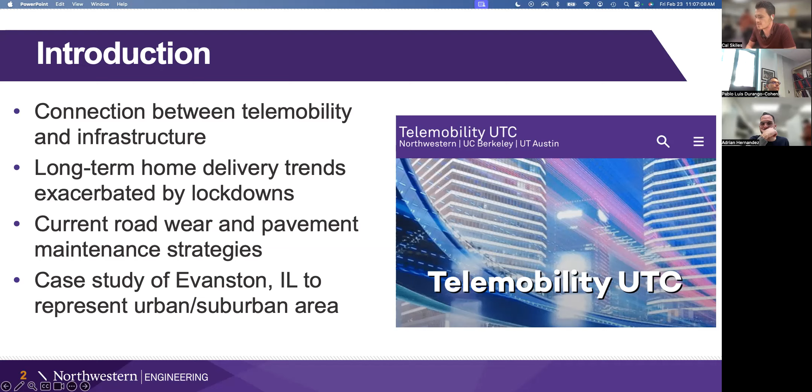And then we're also going to talk about the other side, which is what is going on with road wear and how it may also be happening more quickly and the condition of pavement is getting worse. And we'll talk about the maintenance strategies that are currently being implemented. The case study that will be presented is based on Evanston, since we are very familiar with it, and it is a representative sample of a suburban urban area with a lot of residential streets.

So it's just an interesting point to note that this growth in e-commerce may have been more dramatically impacted short term due to lockdowns, but this general trend was still being followed. And so this work still applies when you think about the general trend of e-commerce and the increase in home deliveries.

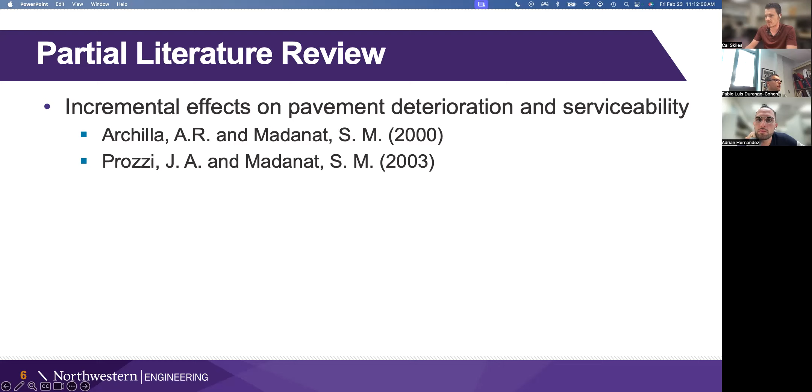Another one is this paper was on how to design asphalt pavement for heavy vehicle traffic. And so we're considering heavier vehicle traffic when considering delivery vehicles versus personal vehicles and changing the asphalt design based on them. And then in the end, what we're trying to do is increase flexibility in pavement maintenance strategies and not just sticking with what the status quo is in an attempt to maximize value.

And each of these papers presents similar ideas. And the hope is that by being somewhat flexible and slightly changing the pavement design, it allows for simpler maintenance by keeping schedules consistent.

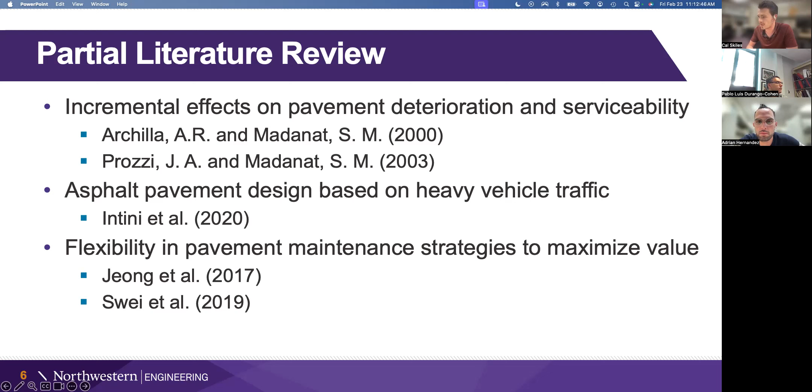All right, so we're going to go back to basics. The AASHO road test was a foundational study and is still used to this day in that it established relationships between pavement performance, pavement design, and traffic loading. And I'm going to go over the AASHO road wear equation thoroughly to show how it's set up, and how it's utilized in this analysis to account for these changes in pavement design and traffic loading, to give the pavement lifespan.

I included this map and this snip from Google Maps to show just how close we are to where this road test occurred, Evanston being up here. The road test occurred in Ottawa, where Interstate 80 now exists. And I learned very recently that one of the traffic loops still exists right next to the interstate, and you can see it from Google Maps. It's seen here.

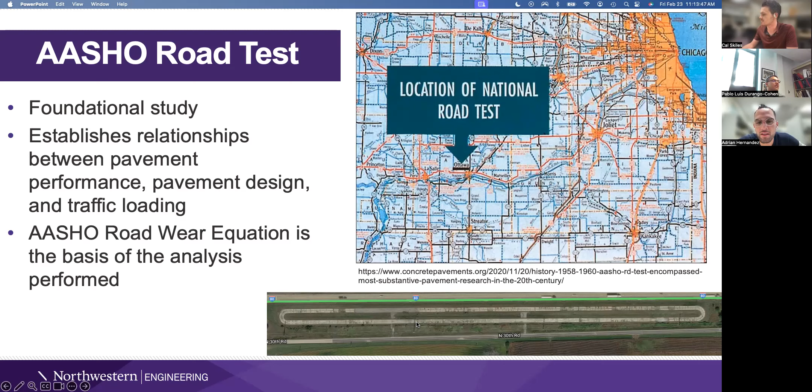So the equation itself, here, N is the number of equivalent single axle loads to failure. So the amount of traffic loading it requires for the pavement to reach a point where resurfacing is required. D is the pavement thickness. And when considering asphalt or flexible pavements, it's a linear combination of the surface, the subbase, and the base.

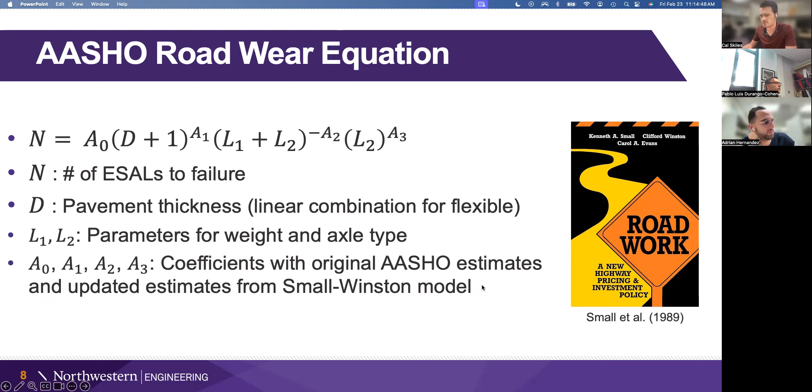And then the L1, L2 are parameters for weight and axle type that are fixed for this analysis, whereas the A coefficients, we are going to use two different model estimates, one from the original AASHO test and another set based on the Small-Winston model from this book. And I'll go into a little more detail on what the differences are between those two and why the update exists.

So these coefficient estimates were developed in the 60s for the AASHO road test, and they were built upon this very controlled environment test. And there was some skepticism around whether that really captured what real world results are or were. And so a number of other models were developed, and one of them was this Small-Winston model, which was built to better represent real world results. And as you'll see later, it leads to shorter pavement lives in our scenarios.

And then another important point is that a model comparison was performed in 2008 by Professor Durango-Cohen that included both of these models, and it showed that they were sufficient, especially when considering pavement failure. So if you're trying to figure out when the pavement fails, not just the transition between different levels of condition, but actually when it needs to receive maintenance or be resurfaced, that's what they're best for, and that is what we are using both for.

So what's shown here is just the differentiation between the coefficients for the two different models. And you see just slight variation, and we'll go into how we use each of these models together and find slightly different results in pavement lifespans.

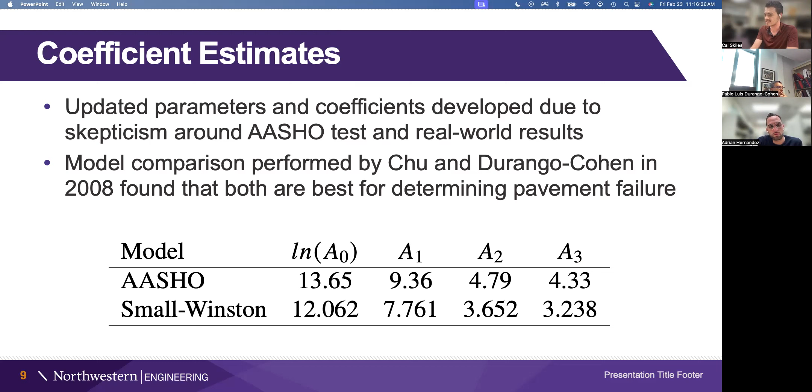All right, there are a number of assumptions made, and each of them has backing in either an existing project, a construction plan, or Department of Transportation statistics, and I'll just go over them really quickly. So the average annual daily traffic of the lowest volume residential street in Evanston is approximately 200 vehicles. This is from the Illinois Department of Transportation.

When looking at a map of streets in Evanston, it's the lowest volume shown on any street, and it represents an example of a basic local road. Pavement design: this is from a construction project at an intersection where a minor residential street intersects a major street, and it showed the pavement design as having an 8-inch subbase and 3-inch surface.

The average urban delivery vehicle weight was found as the medium duty delivery vehicle, which is the most common in urban areas, and that had an average weight of 14,000 pounds. The traffic mix is built off of a previous study that looked into road wear on residential streets. And so it's based on mostly personal vehicles, so cars and trucks, 5% delivery vehicles, and 5% heavy vehicles, which would be like garbage trucks or buses or things like that.

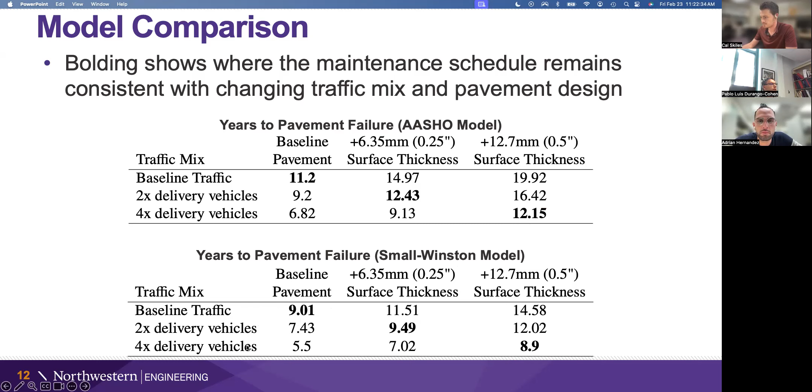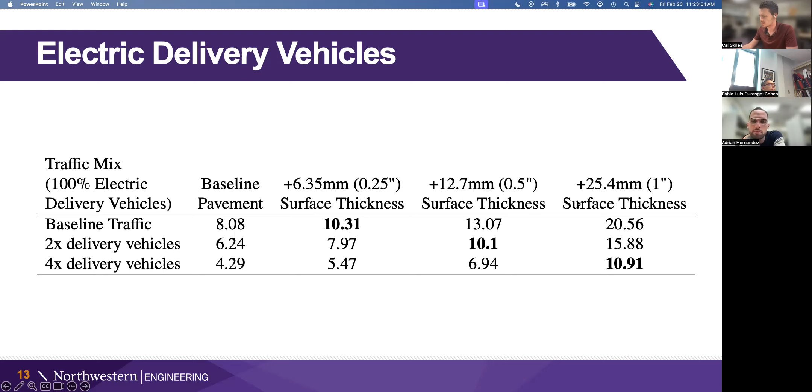And so you see right away that we now need to consider greater increases in pavement surface thickness to have a reasonable pavement lifespan. And the electric delivery vehicles' increased weight, while it could be seen as insignificant, 1,400 pounds out of 14,000, for a number of vehicles that is close to 10 per day, it still over time does build up and does have an impact on the pavement service life. And so we account for that by increasing the surface thickness by more.

All right, then we did some environmental analysis on top of just electric delivery vehicles and the idea of transitioning to them. And so the first key point was that the most important thing to keep emissions down is to keep pavement properly maintained. And so this is the idea of the whole analysis: we want to make sure the pavement is not failing more quickly. We want to make sure it lasts the proper amount of time and we're resurfacing consistently as we have been.

And then the other point that was a little surprising, but a good point to note, is that modern diesel-powered delivery vehicles do not significantly increase emissions compared to gas-powered cars. So this increase in delivery vehicles would be similar to an increase in cars that is also plausible.

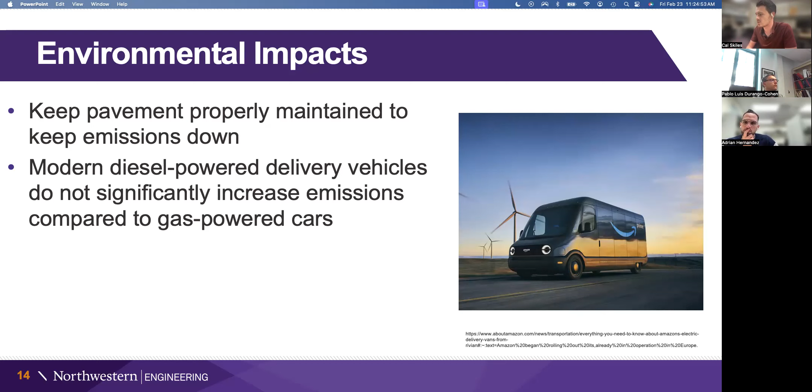And then the point of shifting to electric delivery vehicles is important environmentally because you have a very strong likelihood that these companies see value in shifting to electric delivery vehicles. And it could be controlled from a regulation standpoint because it's all companies and there aren't that many of these companies that could be regulated. And as an example, Amazon currently has about 10,000 electric delivery vehicles as of a few months ago, and they've committed to having 100,000 by 2030. And most of them look like this Rivian van you see right here.

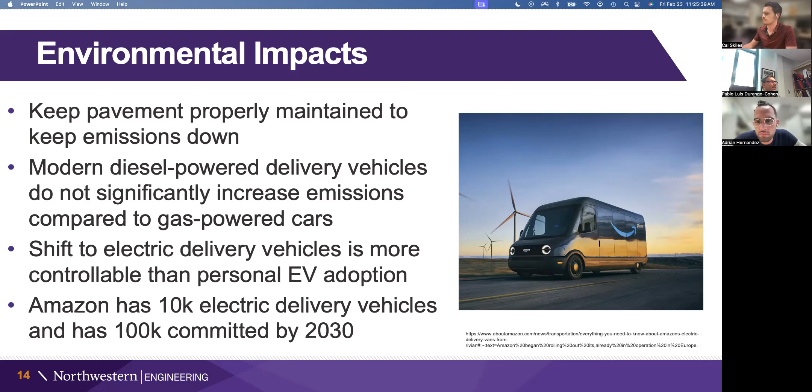All right, now we're going to go into a little bit of the costs involved and how we consider those and justify them. So the materials cost is the only change in direct costs from this pavement design change. The slight increase in surface thickness requires additional materials, and each quarter-inch increase costs an additional $17,500 per mile of roadway. And then the other costs, the fixed, the labor, the equipment, remain approximately the same, while the social costs like public disruption and environmental are reduced by keeping the pavement maintenance schedules the same and not needing to increase the frequency of maintenance.

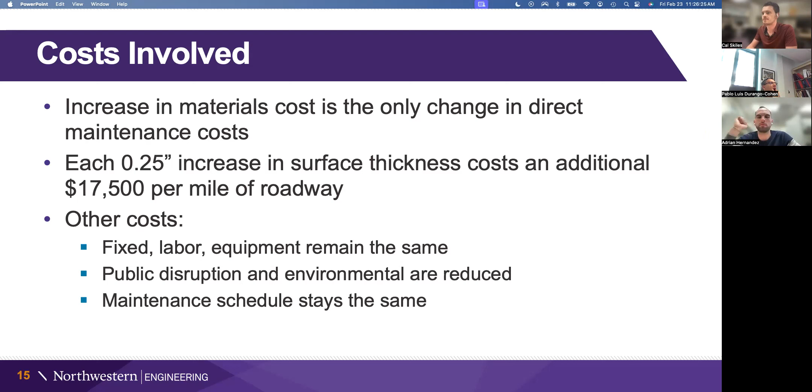And so in Evanston, there are approximately 100 miles of local roadways. And if one were to consider the half-inch increase of surface thickness, it would require an additional 50,000 tons of asphalt, which costs approximately $3.5 million. And the annualized equivalent value at a 5% discount rate is $175,000. And the way that we thought of to account for that is there would be a corresponding reduction in budget allocation to the pavement patching program that we went over earlier.

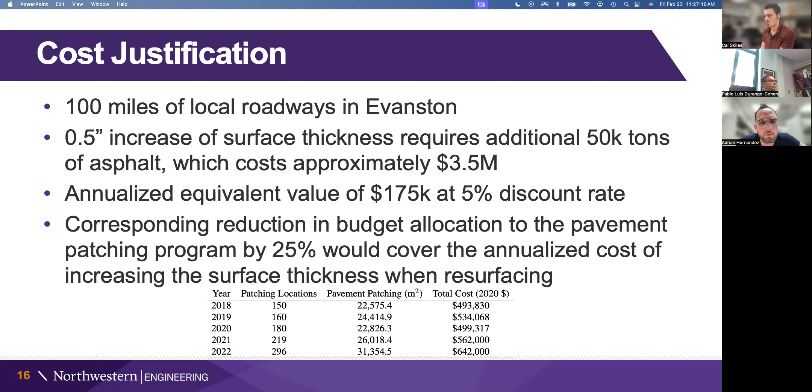And if you were able to reduce it by 25% back to approximately the value it had in 2018, it would cover this annualized cost of increasing the surface thickness when it is time to resurface each of these residential streets in Evanston. Right, because the difference here between 642 and 493 is approximately 150,000. And so we're getting in the ballpark of this value.

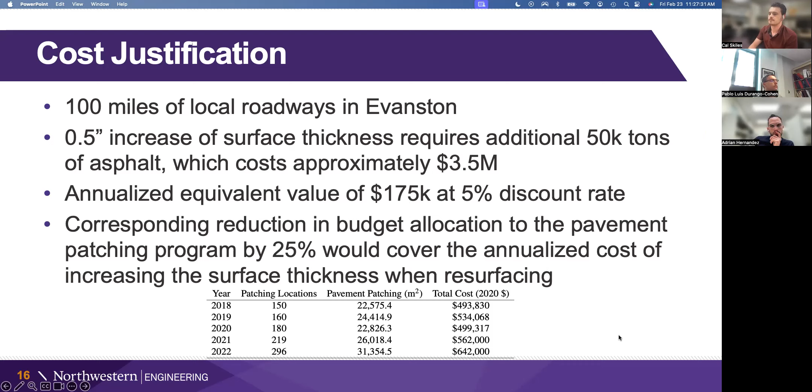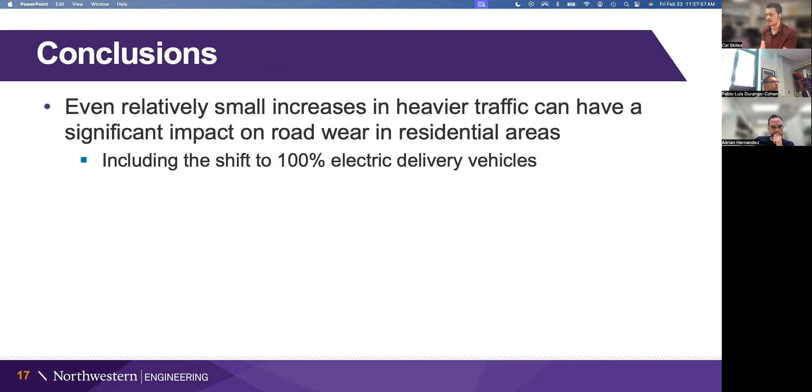So the conclusions, we've covered them in general, but the point is that even having relatively small increases in heavier traffic, this is like going from 5 to 10 or 10 to 20 electric delivery vehicles on these residential streets, or shifting to 100% electric delivery vehicles, has a noticeable impact on road wear in residential areas. And this single change of pavement design that we discussed was just increasing the surface thickness, and it can account for this change in traffic, even if it's very simple.

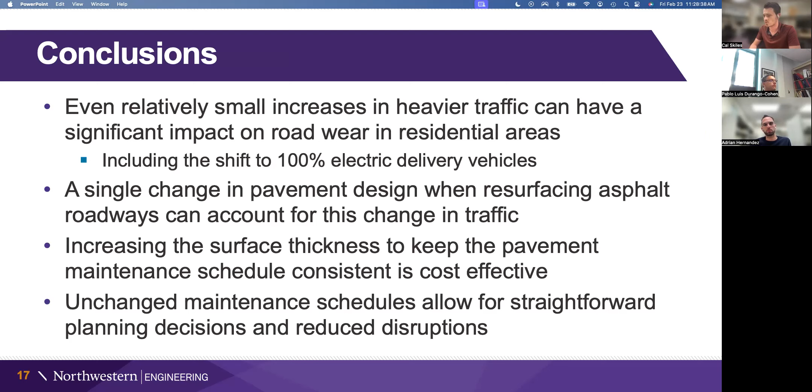We found that it is cost effective when you consider the idea of the pavement patching program being reduced in the scenario where the surface thickness is increased and the road does not fail as quickly. And the last point is that not changing the maintenance schedules, so keeping them consistent, allows for straightforward planning decisions and reduced disruptions, which is what the overall goal was of this analysis.

So thank you. I do have a couple potential extensions that came out of discussions with Professor Durango-Cohen and a few that came from presenting at TRB and people talking to me. So if you have any questions on these or anything at all, please feel free to ask. Thank you, everybody.

Very cool, Cal. I guess I have a question. Please. So I know that the focus and the scope was mainly delivery vehicles, and the question was, for delivery vehicles, that transition to electric vehicles.

But I guess as the penetration rate of passenger electric vehicles increases, this is only going to make this even more problematic. I wonder, do you know what the difference in weight of an average passenger gas versus electric vehicle is? And do you have a sense of what impact this might have, and if this could be applied to that question? Yes. So it's a similar percentage. It's like 10% of the weight.

And so it's in the range of the average passenger vehicle going, because I think what I ended up doing was taking an average between cars and trucks, and it was like 6,000 pounds that I used for personal vehicles. And so it'd be like adding approximately 600 pounds to that. And why it's not as significant is because of the exponential nature of the fourth power rule and this AASHO road wear equation: going from 6,000 to 6,600 pounds has a much smaller impact than going from 14,000 pounds to 15,000 pounds because it's not linear.

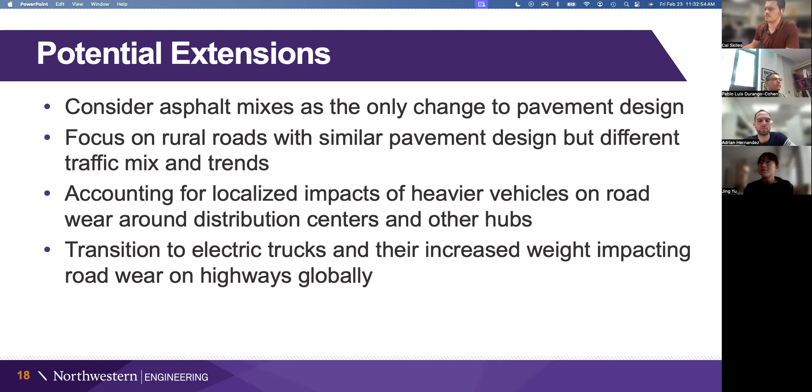Hi, Cal. Yeah. Nice presentation. I may have missed the part where you talked about the baseline. Would you mind going back and talking about which baseline you're using and how you found the baseline? Yes. So the baselines were built out of these assumptions. The baseline traffic is based on 200 vehicles per day, which is a number presented by the Illinois Department of Transportation for a representative street in Evanston.

And the mix is based on a study that was done for how to consider heavier vehicles in rural areas. And so we were looking at slight differentiation from the rural areas to the suburban areas. This is very similar to the rural with a slight change in decreasing heavy vehicles and increasing personal vehicles, and then fitting delivery vehicles in as the medium duty vehicles that existed in that study.

And then the pavement design baseline was taken directly from a road construction project. So an intersection was being redone, and they had all of the information about the side street that was meeting the main street, and the side street was this representative residential street that had this traffic volume. And so we were able to just use that directly as the baseline pavement, and then increase only the surface thickness from 3 inches as our variable in pavement design.

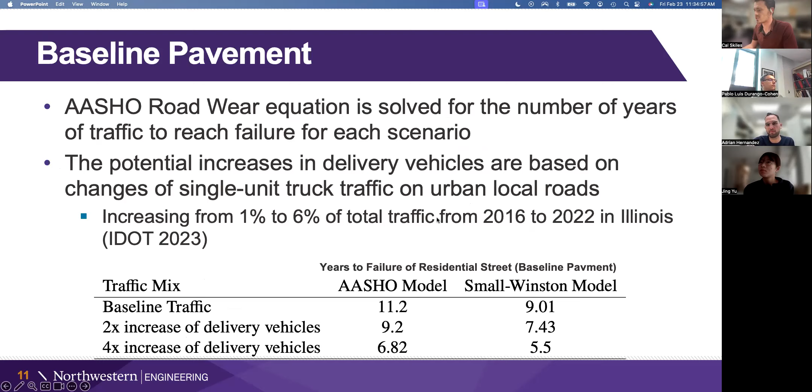Thank you. You're welcome. And it's not the perfect traffic mix. That was another bit of feedback I got at TRB: doing a street study and actually watching the traffic could be an improvement on this exact analysis, but it still represents a very common scenario, and it could be improved upon with better data. I see. Thank you. Yeah, thank you.

Will you be sharing this with the city of Evanston or IDOT? Yeah, Pablo and I reached out to the city of Evanston quite a while ago during this analysis, trying to get some information from them, and it did not go very well. Hopefully, once we get a response from the journal that it's submitted to, maybe then it'll have the weight behind it, other than just our personal project. But that would be great. I think it'd be really cool if someone actually considered it.

Yeah, I think this is super practical, especially since it's using a real case study with pretty solid data, I would say. They might even have access to more accurate data. And I also think, to a degree, it should correspond to our anecdotal notions of what's going on. Everybody knows that e-commerce has gone up, so it'd be a little bit disappointing if they didn't want to learn from this. But I know that's a little bit idealistic of me. So I was just wondering.

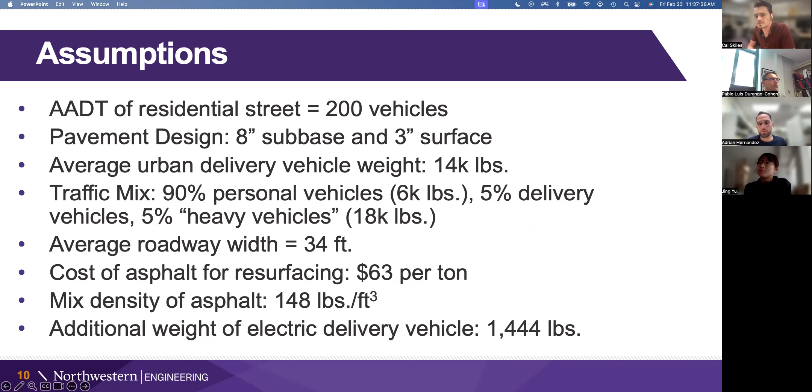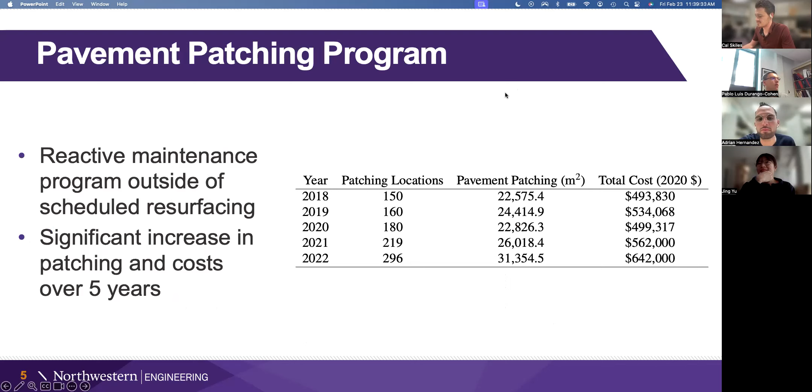And of course, this could reflect either unsatisfactory design in a particular location, which is part of your study, but also increased traffic, like overrepresentation of increased traffic on certain streets. It could also be residents in those locations that are particularly unbashful about calling the city. Interestingly, on all three fronts, one of the things you see eyeballing it is Northwest Evanston, which is perhaps the wealthier part of Evanston, which of course is where you'd expect more online shopping, et cetera.

No, and you made a really good point that whether the assumptions made are exactly correct or not isn't the most important thing, right? These roadways are designed as simple asphalt roads, and we are pretty sure the amount of traffic is changing, and the weight of the traffic is changing. So it's not the exact change in pavement design or in traffic; it's more that there is a potential change in pavement design that will account for the change in traffic. Yeah.